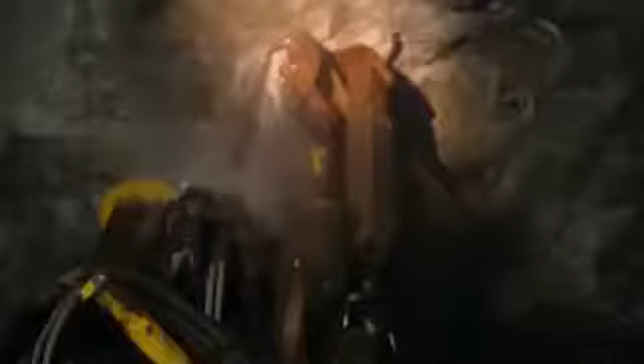My God, burning hot water. Where makeshift supports hold back millions of tons of rock. I'm gonna lose it. All for one of the most valuable metals on the planet. Solid gold. That's not even a joke, that's actually solid gold.

I'm in Johannesburg, South Africa. The locals call this place Egoli, which means city of gold. And quite literally, the soil under where I'm standing is the richest in the world. Located in the northeastern highlands of South Africa, Johannesburg sits above half the world's gold deposit.

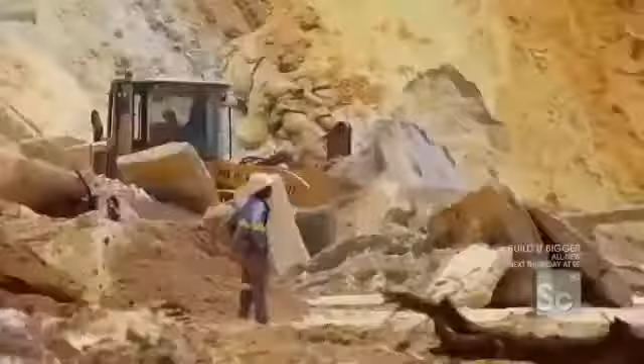When gold was discovered in Johannesburg in the late 1800s, people flocked from all over the world to mine this ore. It was so plentiful that you could actually see the gold on the surface. Over time, mines opened from the east side to the west side of the city, mining deeper and deeper into the earth. Today, there are 70 gold mines in South Africa, employing over 500,000 people.

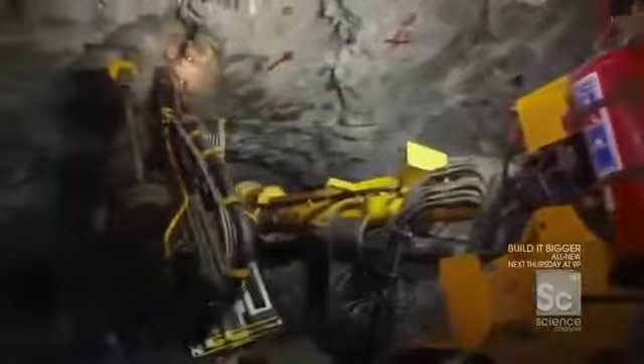The problem is, after over a century of mining, this precious resource is beginning to run out. In the last 10 years, the country's gold production has dropped 45%, while the price of gold has skyrocketed. Now, to re-establish the nation's most important industry, one South African mine is attempting to dig deeper than ever before.

An hour outside of Johannesburg, the Mponeng mine is already the deepest mine on the planet, a subterranean gold factory 2.5 miles down, with more tunnels than the New York City subway and the world's longest elevators. However, most of the original gold deposit has already been mined, and the rest will be gone in just 8 years.

So to keep the mine going, geologists have been drilling and testing in all directions, searching for more gold. They finally found it, a new deposit called a reef, located over 3 miles from the surface, holding over 140 tons of gold, worth over $6 billion.

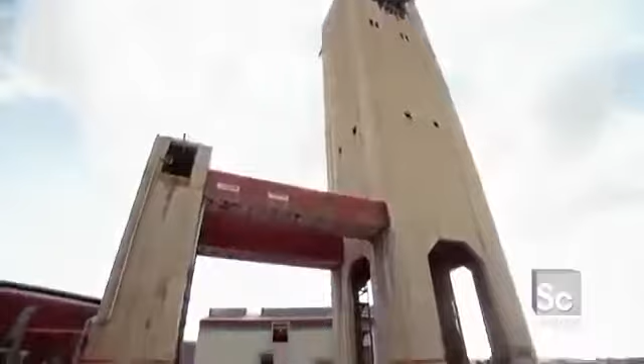So if you didn't go deeper, within about 7 or 8 years, you would have simply mined all the gold that you can get at that depth. That's right. So this new project gives you the potential opportunity to extend the life of the mine by how many years? With the current project, the life of mine will be extended to 2029. 2029? That's correct. So instead of 7 or 8 years, we're talking about 20 years.

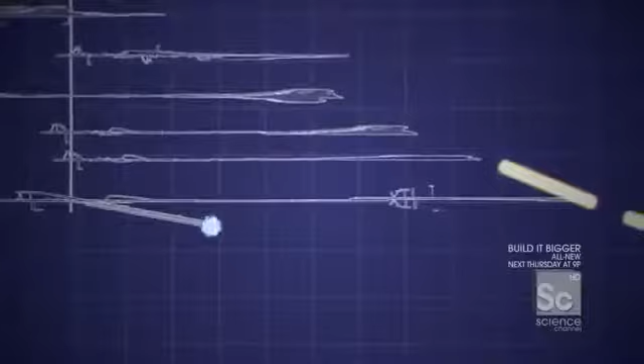That's right, yes. While the team mines out the final gold deposits in the existing mine, they've also added a new deepening team. Their job? Tunnel 7,000 feet deeper to reach the new reef, one blast at a time. The commute to a job a third of the way into the Earth's crust takes an hour and a half.

The trip starts in the longest elevator in the world, a 50-ton beast that carries 120 miners at a time. You know, given where we're going, Gordon, you guys didn't do much to kind of soften the blow and make this thing look nice. This is it. This is mining. This is reality. You ready? Okay, right, let's go. Right on key, Billy. All right, here we go.

The elevator travels at 40 miles an hour. It pretty much feels like you're free falling down into the earth. Now 1,000 feet from the surface, 2,000 feet. I'm now deeper than the Grand Canyon. I'm now almost at 8,000 feet. For every 100 feet we drop, the rock gets 1 degree hotter.

Every couple hundred feet, it gets a little bit hotter, a little bit more pressure, and you can feel that inside your head. We're now approaching the bottom. This will be 12,600 feet. Keep in mind, this is the deepest point that any mine has ever worked at in the history of mining. From the bottom of the elevator, it's another 1.5 miles to the face of the tunneling project.

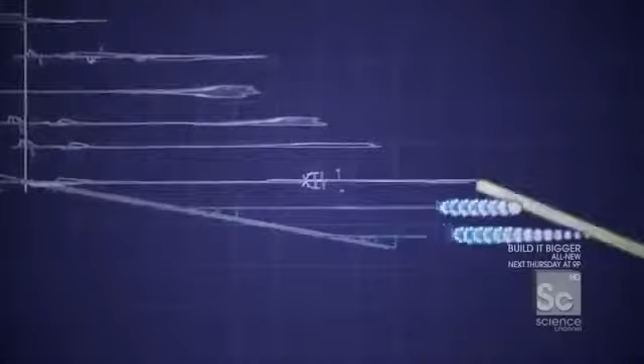The closer you get to the active face of where the rock is, the hotter it gets. So as I step down, every single step, I can feel the temperature getting slightly higher and slightly higher. And right there, that is the very deepest point in this mine. It'll take 600 blasts to reach the new gold reef. They're prepping for blast number 540.

And blasting in the deepest spot on Earth is unlike any other kind of blasting. Faults scattered throughout the rock make earthquakes and rock falls a constant danger. Punishing geothermal heat also makes the working face a scalding 150 degrees Fahrenheit. Oh my God. That's burning hot water. The water that's being heated by this exposed quartzite is literally brought to the point of burning my hand just from the energy from the Earth. Energy from the earth, and then, of course, the drilling.

Okay, so Gordon, this exposed wall right here, this is the wall that we need to get out of our way. Yes? There's gold back there. Yes? So this wall has to continue to push deeper into the earth to enable us to go up and straight out to get that gold.

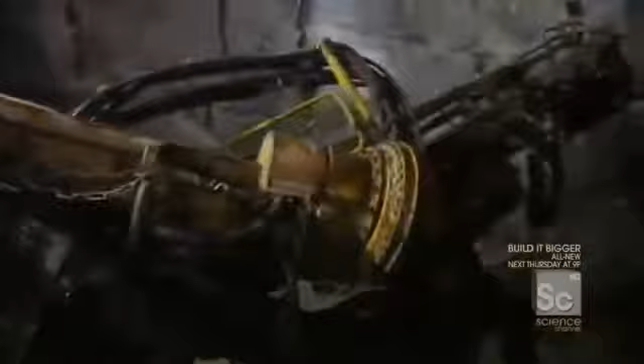Correct. The rock is riddled with faults, which means the energy from the blast needs to be carefully controlled or risk creating an earthquake. They use a diamond-shaped blasting pattern that concentrates the first pulse of energy into the center, opening up a cavity for a second and third round of smaller charges to safely break up the edges of the face.

Okay, now why do that? Why not just have an even amount everywhere? Well, you want the most energy in the center, because this is the hardest place to break the rock in. As you move outside, you want less damage. If you damage the rock on the outside, you have to put more support in it. You want to keep the ground as stable and as fracture-free as possible on the outside.

The dynamite is mixed and tested on site. Gordon, what are we doing right now? Right, we're going to test the explosives to see if it's mixed properly. There's two ways to do it. With a scale or the miner's way. Put some on your finger, tongue out. Taste, battery taste, it's good. So if it feels like I'm licking a battery, I'm happy.

That's it. Just lick it. Just spit it out and lick it. Put it on your tongue. Oh, God. Got a good bite to it. Oh, my God. That is awful. Looks like it's good enough to use. Yep, it's good. This will blow up.

So, like loading a bayonet, we have now at the tip of my lance the explosive, the cable right here. Goes in that hole. This can't actually go off, can it? It's very safe. Very, very unlikely. Okay. Push it all the way in. Lance is now in. That's it. The crew pumps 3 gallons of explosives into each drill hole.

In South Africa, the world's deepest mine is blasting 40 feet deeper each day, tunneling towards a reef of new gold worth $6 billion. Almost 3 miles down, each blast risks rockfalls and earthquakes. And with the latest blast detonated just moments ago, it is essential to quickly support the new tunnel face.

Once the blast is complete, the now newly exposed rock is susceptible to the nearly 13,000 feet of pressure pushing down in the tunnel. So to make sure this is safe before any more mining can happen, these guys have to re-support the roof and keep this ceiling up above us. So once you remove the rock, all the pressure from the 12,000 plus feet of Earth is pushing down on our heads right now. Yeah. So the tunnel wants to collapse. That's the natural desire of the Earth right now. That's a natural desire. That's what it tends to do, is to close up.

So essentially, like Atlas, it's your job to sort of push back on this rock and support this open tunnel. Yes, that's basically our job, what we're doing. You look like Atlas. You're a big man. You can hold back the rock.

And so, collaboratively, all of these 30-some-odd split sets will give us basically the roof to know that it's safe for us to keep mining. Yeah, that's what's going to happen. You got a big day.

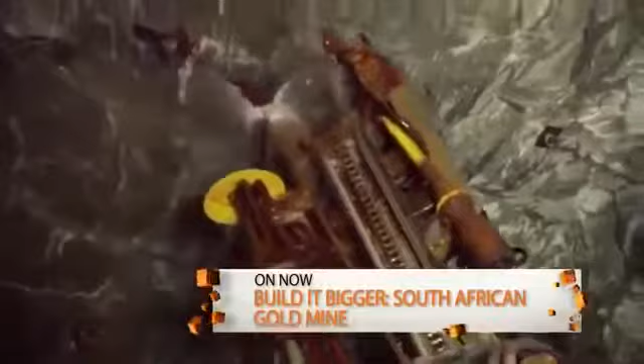The team installs them with a hydraulic drill and a motorized screwdriver. All right, so to get us started, Johan, why don't you drill the first hole? I'll drill the second hole. Go for it. So the first thing that's happening right now is that Johan flips the switch and immediately water starts pouring out to cool down the rock. All right, so there it is. Now we have a drilled hole, 41 millimeters wide, hollow, and ready for steel.

Now check this out, you're gonna watch him change bits. Out goes the drill, in goes the screwdriver. Yeah, look at that. All right, let's screw it in. All right, can I give it a go? All right, Johan's stepping out, I'm stepping in. Each drill hole is just 1 millimeter smaller than the steel rod. Yeah. So when the rod is driven in, that 1 millimeter difference creates enough friction to hold back all

17 tons of rock. So above our heads right now, you've just applied over 560 tons of force to hold back the Earth. Yes. I mean, that's what happens, I guess, when you have almost 2.5 miles worth of Earth pushing down on your head. Yeah. Incredible. That's what it takes to push this tunnel just 12 more feet towards becoming the very deepest occupiable point on planet Earth.

When complete, this tunnel will be the central highway to 140 tons of gold. Once there, miners will use smaller tunnels called crosscuts to get it out. Miners are already using this method at level 120, just 600 feet above us. It's a 2-mile train ride, and then a mile-long hike to get to the exposed reef. And it's here we'll be blasting for gold.

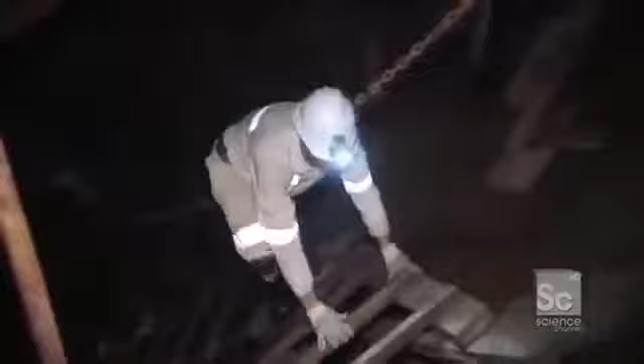Oh my God. It's just become clear to me that where I just came from, that ridiculous ladder, that was actually just the beginning. Look where we're headed next. Oh, dear God. You've got to be kidding me. This is not what I was expecting.

The biggest danger when digging 12,000 feet down is triggering a seismic event. There are dozens a day down here, and nowhere to go if one hits. To minimize the disturbance to the rock, the tunnels are kept as small as possible.

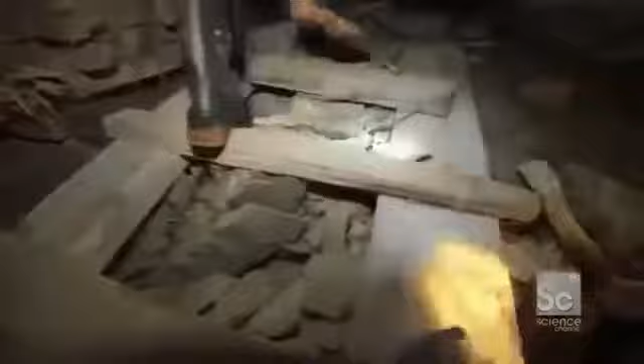Now, as I walk up this precarious angle, just keep in mind, look to either side. It's these wood rock packs that are literally holding this rock up, right? This rock, as you can see, has had its support taken out. They've removed the rock. So the inclination of this geology is to simply come right down on top of us. This support is needed to withstand the massive seismic shifts caused by the blasting.

So, Clive, on a given day like today, how many seismic events happen, for example? We could have hundreds of seismic events, but most of them happen during the blasting time. You mean when the blast just went off like 4 seconds ago? No, that's not the development blast, but the face blasting. Okay, so the blasting is going to happen here this evening. At the face, yeah. So we're on a sequential, centralized blasting method.

Everything's cool. Okay, Clive, my God, that was definitely it. I definitely thought that was it. I definitely was like, well, no, we're fine. Can I just continue? Oh yeah, Clive, just continue with what you're saying. Don't let the neighboring explosion in the rock impede your progress. What's happening inside of you, man?

You're like a metronome. The biggest mistake you do, Danny, if you start running, you're running into the danger. Yeah. If something happens, just stand still, because the moment you jump up, you can hit your head, fall over the rocks, and that's how you get hurt. By the time you've heard something, it's already too late. I knew he'd say that.

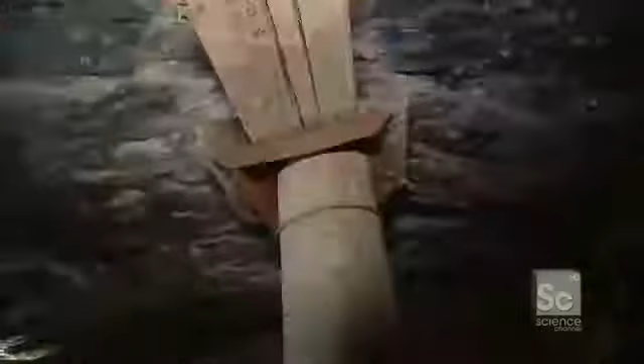So it's this guy right here that, just like a column, is holding up the roof. And we can't do any drilling. No safe work can happen until we put in these support columns. I can't deal with it. I'm going to lose it. That's why we put in support.

I understand. These 4-foot-high steel jacks push against the overhead rock, supporting a whopping 10 tons apiece. To install the jack, they first clear the ground of any loose rock. So as you can see, we're essentially wedging this thing in, pushing it down solidly into the ground, and then pushing it tight up to the rock face, and this becomes a strut or a column that holds back this rock.

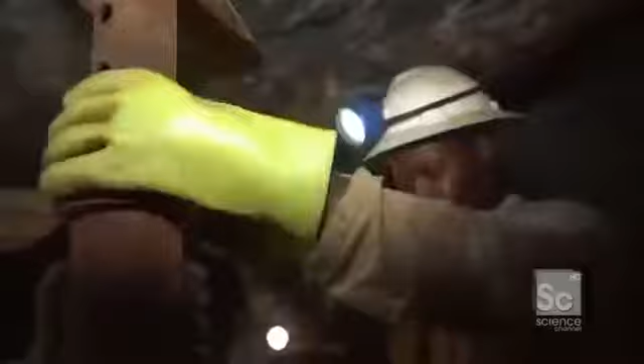So look at that, you can see right there, just like a jack that you jack up a car to change a tire, same principle. He's jacking it up, it's pressing up against the rock, and now this thing is one solid column, one of many that's keeping this roof safely above my head.

Coming up, servicing the world's deepest elevator means slicing one of the longest and heaviest steel cables ever built. This is like an extraordinarily bad idea.

For the miners that commute 2.5 miles underground, 3 shifts a day, there's simply one way in and one way out. The elevator shaft. The elevators are the very lifeblood of this job site. They are what enable them to get 3,500 workers underground and at the same time pull above ground literally hundreds of thousands of pounds of rock.

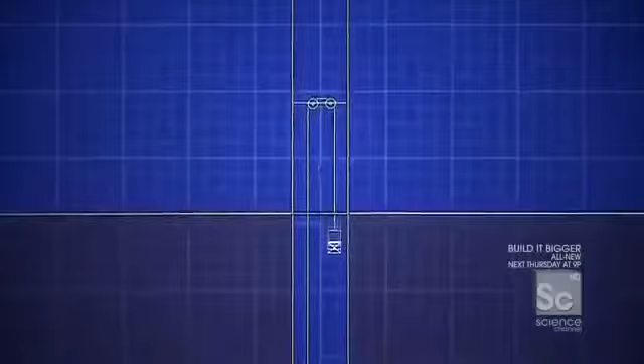So given the extraordinary requirements on this site, these are no ordinary elevators. A typical elevator uses a weight to counterbalance the load. However, a weight for an elevator this heavy would be more than 60 tons. Instead, the mine offsets the cab with a second elevator. So when one elevator goes down, its weight pulls the other one up.

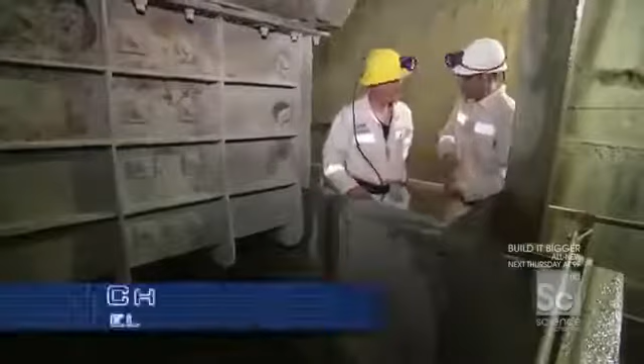Instead of having to actually pull the elevator up and actually lift its own load, you counterbalance its weight with another hoist. Yeah, with the skip that is actually descending. That's a counterbalancing effect that we have in order to improve the efficiency of your winding cycle. With 300 lifts a day, the mine's elevators travel the distance to the moon every 9 months.

You have the weight of the rock, you have the weight of the hoist, you have the weight of the cable, and all of this is happening constantly on both sides, basically 24 hours a day. Yes, 24 hours a day, sometimes 7 days a week. Including the 20 tons of its own weight, the total load on this rope can be more than 70 tons. Last year, a rope at a nearby mine snapped, dropping a cab, killing 8 miners.

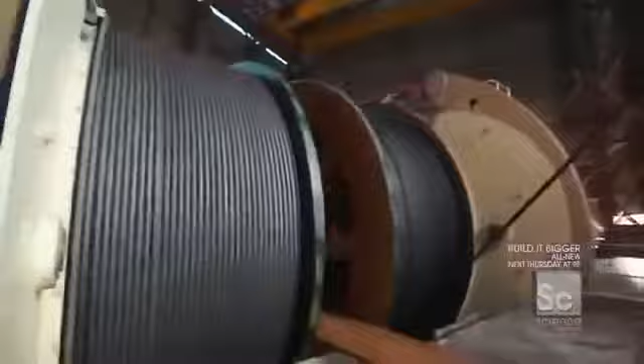So to prevent a similar failure, the team is performing a stress test on the elevator rope. What are we doing today? We're going to cut the front end of the rope and then send it away to the laboratory to be tested in order to ensure that the integrity of the rope is still all right. I mean, it's hard to overstate, but this is for the safety of people who are in the elevators, for the ability for you guys to mine. This is the lifeline of the project right here, right? That is right. It's a risky cut.

Over time, thousands of trips up and down have twisted the rope, tightening it and building up enormous amounts of torsional energy. If I have a plastic shopping bag and I spin that shopping bag, it'll spin and spin and spin, and all of that torsional energy is bound up in that rope right there. And if I let go, it'll unspin very quickly. Yes. And today, as we cut this rope, all of that torsional energy is built up inside the rope. Yes. So we have to make sure to take out the spin before we cut the rope. Yes, that's correct.

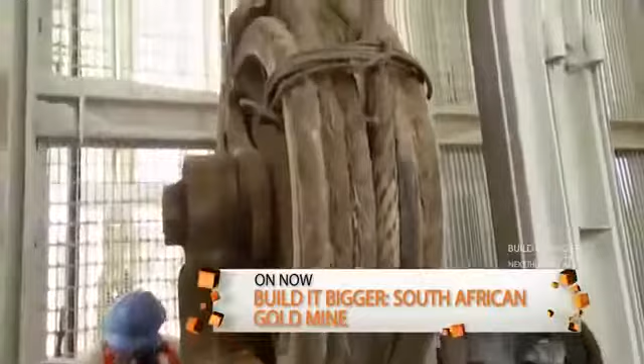With the elevators offline, no rock will be hoisted to the surface. The team has only 2 hours to get the rope section cut and the elevator back in service. The first step is to secure the elevator with a cross-beam support. So it's this piece of steel right here that locks the conveyance into place so it doesn't fall when the cable comes out. Then, while standing on top of the elevator, they unhook the rope.

And Chris, I have to put a harness on because what happens if I fall down there? How far is that? Well, we will find you 8,400 feet below. 8,400 feet down. In many pieces. In many pieces. Thanks, Marnie, a man of details.

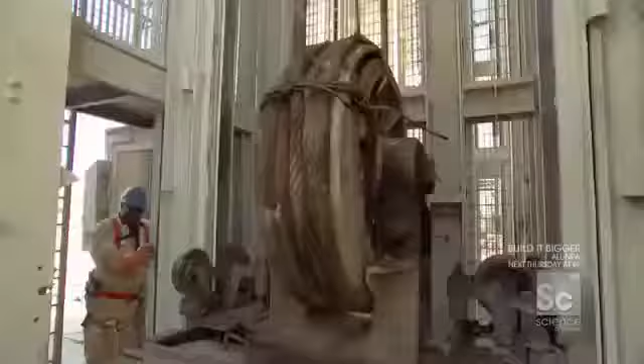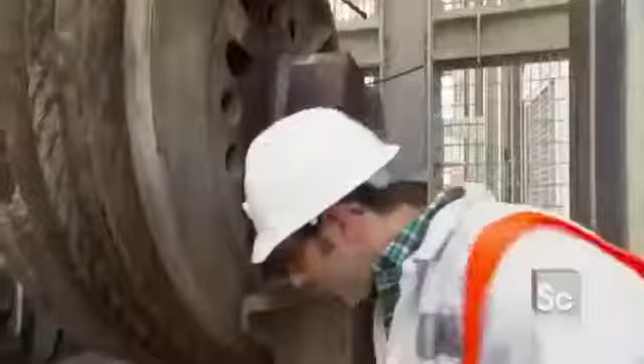The rope is held in place by a single 100-pound steel pin. It's so tightly wedged in, they have to use a hydraulic jack to get it out. That pin right there is the very last piece of steel that's holding this entire conveyance to the elevator. So basically, we're going to use the jack to just smack this pin out and disconnect the hoist from all the cable. All right, Marnie, let's do it.

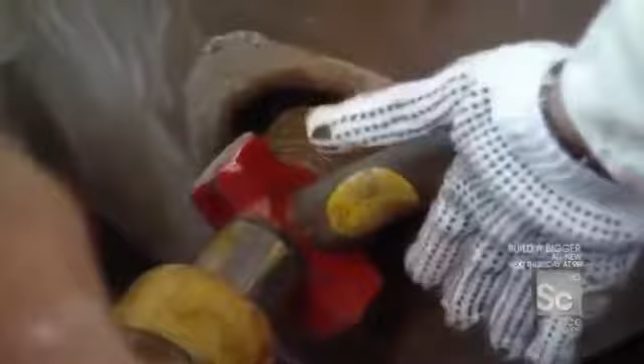Come to me. Let's make it happen. Want to bring the jack? You want the hammer in there? Yeah. Okay. Right, Nick. Is this going to go slow? Oh, Jesus. Whoa. Start up. Right, Nick. Go again. Whoa. You're right there. Whoa, Nick, man, you're going bananas over there.

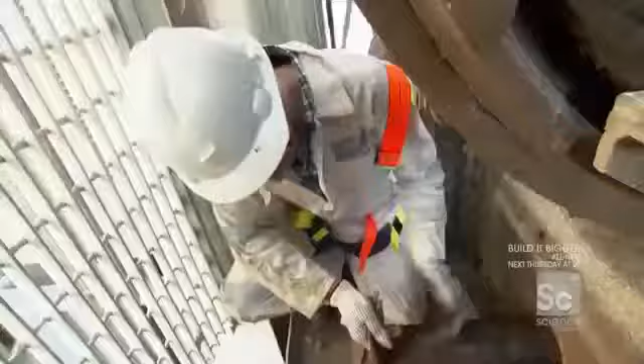To be sure the pin doesn't damage the top of the cab, it's coaxed the final 4 inches by hand. So, Marnie, the pin is like 99% of the way out, right? Yes. Okay, so slowly ease the pin out. Yeah, we just pull the pin out. All right. You ready? You want to smack? I'll smack. You hold. Is it coming? It's coming. Ready?

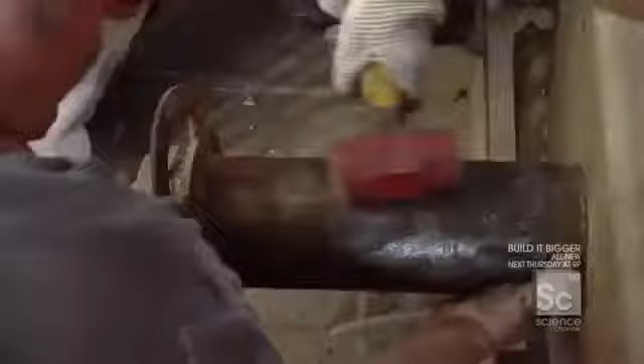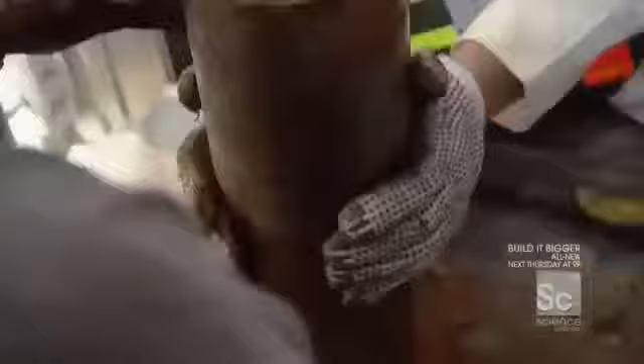Okay, hold on. Okay. You okay? Got it, put him down there. Okay. I feel like we just kind of delivered a baby here.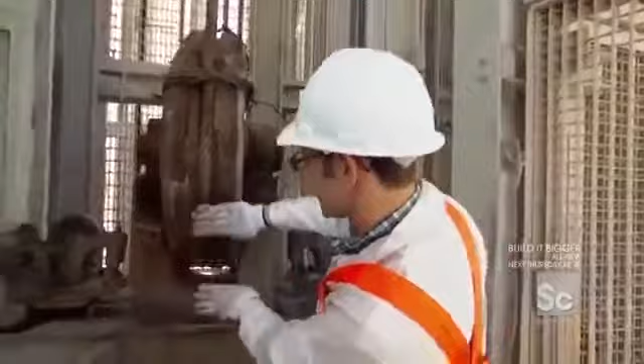All right, so let's do it. The pin is now out. Let's separate the compensator from the hoist and get these cables over there so we can cut them. To keep the tightly wound rope from violently spinning out, first they have to clamp it down. You open this up, and then we're going to take the rope, lower it into this hole, so that when we finally cut the rope, all that torsional energy, all of that spin force will get released and controlled with this thing right here.

The rope is locked in with 4 bolts. So this is essentially like a brake pad. Yeah. That's like a caliper on the brake. That's it. When it's cut, it wants to spin like crazy, but you can apply pressure, it won't spin, and slow that spin down.

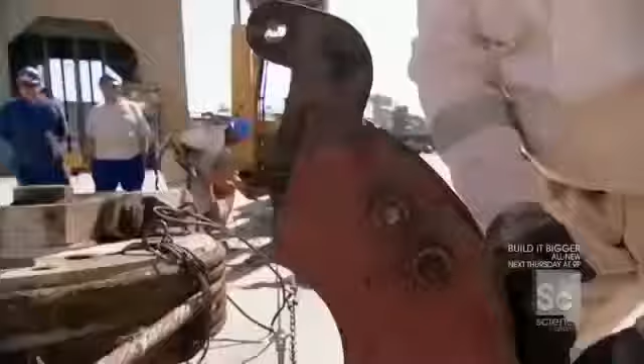With the cable locked into place, the team can now remove a 25-foot section for testing. Because it's strong enough to lift 3 fully loaded semi-trailers, the only way to slice through it is with an acetylene torch. We're talking about, you're melting this thing. You're actually cutting it with a torch. Yeah. You have molten steel slag. There's so much embedded torsional force that when you finally cut the cord, it can actually spin out and spray you with that stuff.

Yeah. There you go. Thank you, sir. Great. You can open it there. Do I need your glasses? Yes, I think this would be better. And also, let's be honest, I'm gonna look like a badass. I'll trade you those. I have an astigmatism, so. Hey, Nick, I'm gonna hit it right here, right, buddy? Yes. Right there, you happy with that? Can you see with those glasses on? It's clear? Yes, you look pretty now. I look pretty? You look handsome and clever. I don't know why, Nick. You look so much smarter all of a sudden.

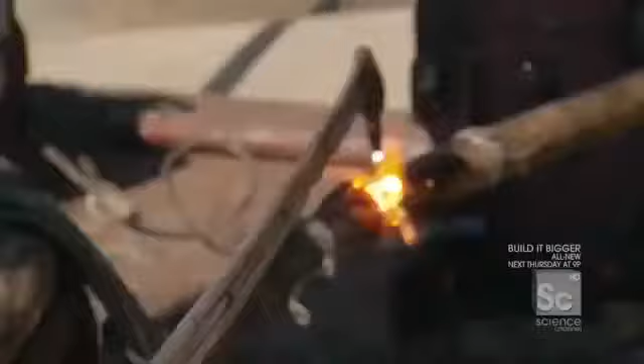All right, I'm gonna crack open the acetylene first. Open. Gets a little bit of acetylene going. And fire. This is like an extraordinarily bad idea. The torch burns at 3,000 degrees, which is 1/3 the temperature of the sun's surface. There it is. She's opening up. It's gonna kill me. It's gonna kill everyone. Extreme heat is needed to melt through the dozens of interwoven steel wires inside the rope.

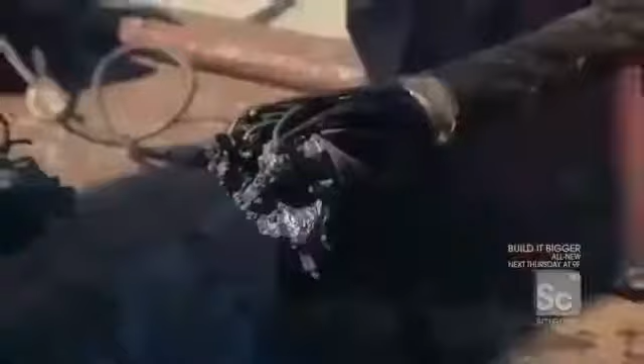Oh, there it is. There it is. Oh! All right, so I get back my glasses. Nick, the Boilermaker, gets back his torch. And we're set. Now that it's separated, we're going to release the tension and let all of that force out of the cable. Marnie, you ready?

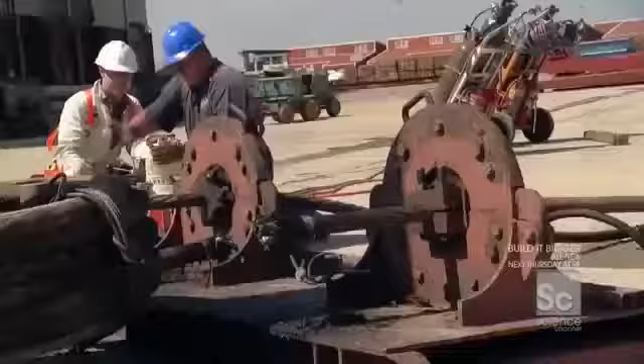Release it out, start spinning, immediately pull it back, lock it up. Here we go. All right, everyone stand back. Let's release the tension. Dear God. Ready? That's it. Again. It's finished now. Yeah. Well done. That was stressful, man. Okay.

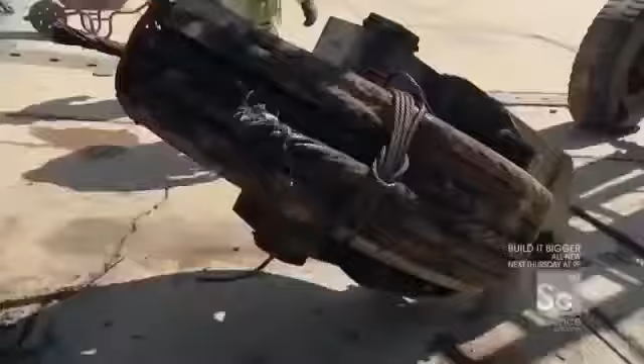Okay, with the piece now cut off, this can go to testing. And now, as you can see over here, we have to re-spool this up, connect both wires, and ultimately, within about 1 hour's time, get this cable back in the shaft and the mine working again. Coming up, I strike gold in some of the oldest rock on Earth. This is it. This is the gold.

But first, what skyscraper has the world's longest elevator? The answer after the break. Your trivia answer. Dubai's Burj Khalifa has the longest elevator at 2,000 feet, just a quarter of the size of Mponeng's elevator. South Africa has more gold deposits than anywhere on the planet.

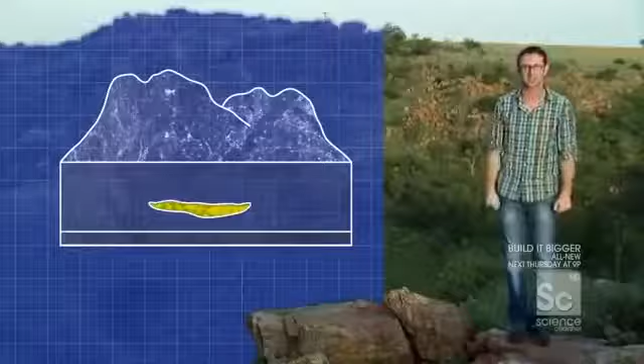Okay, this is it. This is it. This is the gold. This is the gold. This is the ore body we're gonna mine. This tiny, small 3-foot swath is why I'm now almost 13,000 feet under the ground. 100% right. And sort of packed inside of here in tiny amounts throughout.

It's gold. The gold is in dark carbon particles scattered throughout the rock, making the reef grayish, not yellow in color. What's so incredible is the gold is so tiny that, I mean, I can't see it right here. Yeah, so little. I mean, specks of it. Yeah. Like particles of sand is inside of this, that's it.

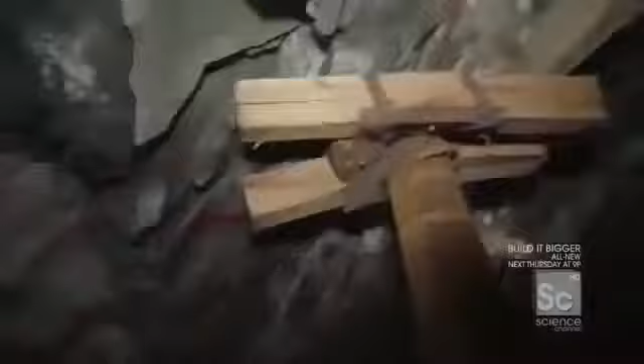The fastest and safest way to loosen this ore is to drill and blast. Are we ready to rock and roll? Yeah, ready to drill. Where's the drilling? Right down here. Down here. So now that we found the gold, now it is time to get it. Miners drill blast holes into the ore and fill them with a powerful emulsion dynamite. So we're going to put a hole about 4 feet deep into this rock using this enormous drill.

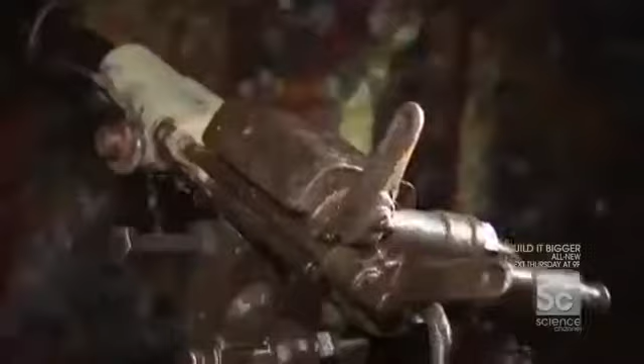Yeah. Basically, this is just a very, very large chisel that's rapidly making contact with the rock. A big chisel. It is a big chisel. Michael, Jacques, it is time for us to put a hole into this gold, get some explosives, and get what we came for. Yeah. Here we go.

The gold reef naturally dips at a 22-degree angle, which forces the miners to perform precision drilling at a steep decline. The goal is hold it tight, keep it level, and push the drill in. Okay. Push that way. Are you ready? Forward. Yeah. Here we go. Push it. Push it. The drill runs on compressed air, hammering through the rock at 6 inches and 3,000 blows a minute.

My hand is still vibrating. You're good. You're good. You can be a driller. No, I can't do it.

The reef wall is now ready for blasting later tonight. The confined space and constant earthquakes mean blasting can only happen between shifts. 5 tons of charges are detonated from the surface. After blasting, the rock has a 5-mile trip down into a storage silo, back to the shaft, and then up to the surface. After the blast takes place, all of this newly loosened ore will come sliding down this slope. It'll arrive here in the gully.

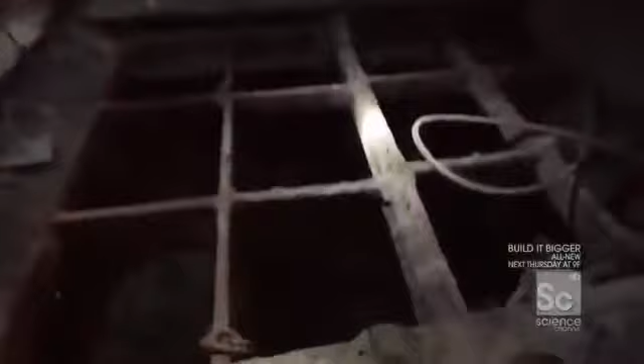It's then when this device called the scraper will essentially scoop up this loose material and drag it all the way down to something called an ore pass. The scraper drops the gold hundreds of feet into the ore pass storage silo. And just to be very clear and straightforward about how deep this hole is, if I may. Yeah. It's like the colon of the earth.

For the miners, this is what it's all about. They drilled, they blasted, they loosened up that ore, and now we're taking it, putting it down this hole, and ultimately sending it up to the surface to be transformed into gold bars. 20 miles of trains and conveyor belts move the gold reef rock to the main shaft. It's there where the gold rock meets up with the waste rock from the deepening project. Both travel side by side up to the main shaft together.

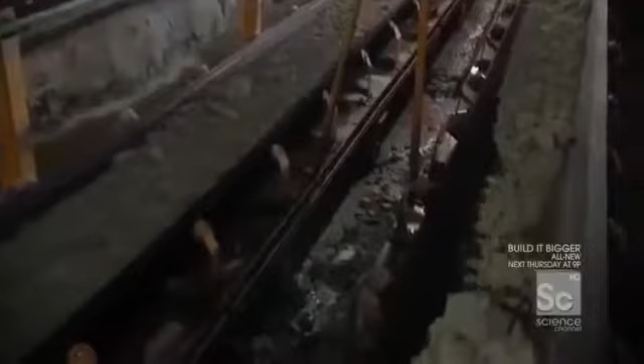The contents of that conveyor belt are worth millions of dollars. The contents of that conveyor belt are totally worthless. And every single hour, this mine accumulates over 450 tons of both gold reef and waste rock. The challenge is to get them out of the mine and up to the surface. The reef and waste rock travel down a conveyor belt as long as a football field to two 50-ton elevators. The job of sorting the waste and the gold belongs to the conveyor operator.

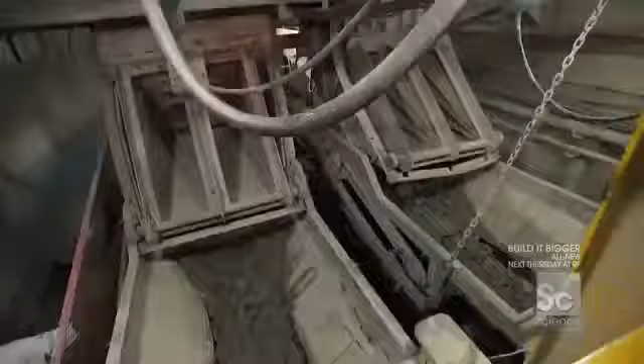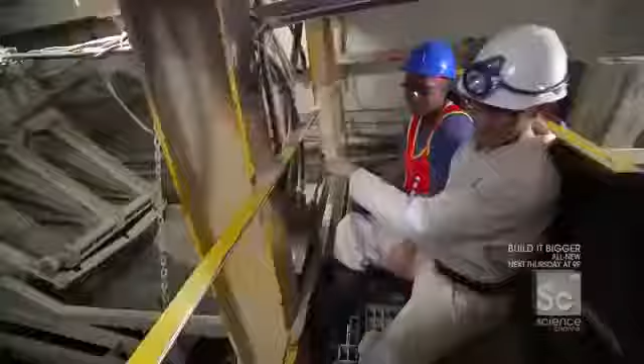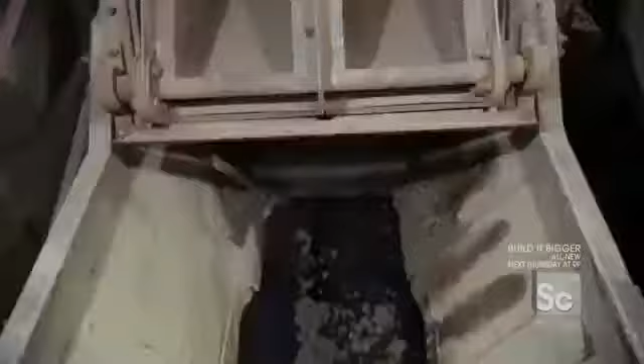Sort of appropriate, really. Here comes the big dumper. Big dumper. Not a lot of variation in the task. It's open. And closed. Open and closed. Sometimes we open. Other times we close. Yes.

She's got it under control. She is sending this stuff to a hoist, which is then going up to the surface over 2.5 miles. Coming up, I enter one of the most highly secured buildings in the world to forge $4 million of pure gold. Solid gold. That's not even a joke. That's actually solid gold.

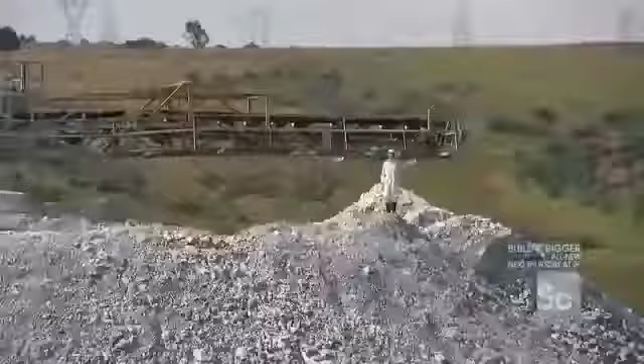Last year, South Africa's deepest mine produced 13 tons of gold and 2 million tons of ore. Every ounce of gold they mine produces 3 dump trucks of waste. Here at the Mponeng mine, in just a 24-hour window, they pull out of the earth just 100 pounds of solid gold. Now, to get that 100 pounds of gold, in that same 24-hour window, they have to excavate nearly 15,000 tons of rock. So to put this in perspective, in a given 30-day period of time, we're talking about nearly 500,000 tons of solid rock, building a veritable man-made mountain right next to the mine.

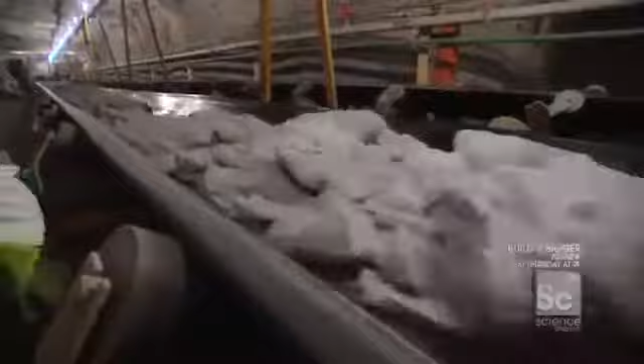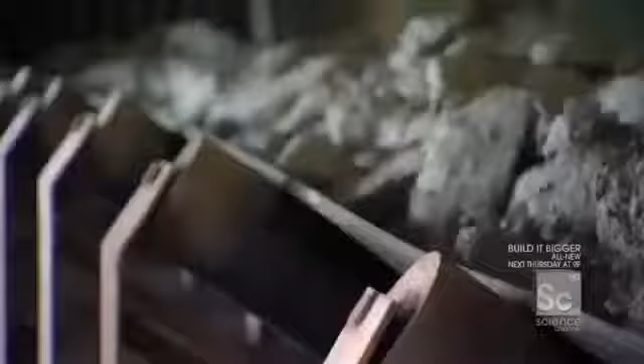Going from rock to gold takes 48 hours of processing. That happens at the mine's 20-acre on-site processing plant. So the ore that comes out of the ground is not a shiny gold nugget that I imagine a panhandler from the 1880s biting on. No. This is not it. It's not visible with the human eye. So we're talking about infinitesimally small bits of gold powder. Yes. Invisible to the naked eye, kind of scattered throughout this rock. And your job is to somehow get that microscopic powder out of the rock and then recombine it into solid gold. Yeah. That's exactly what we do.

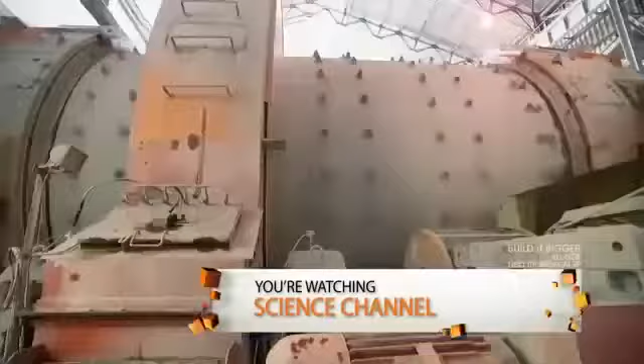First, a 4,000-ton mill crushes the ore into a sand-like dust. The team then mixes in cyanide and carbon to dissolve the quartzite and leach out the gold. The purified gold then goes to the smelting house for the final step of the process, melting and pouring. Today, they're pouring 10 55-pound gold bars worth $4 million. The product of half a week of mining.

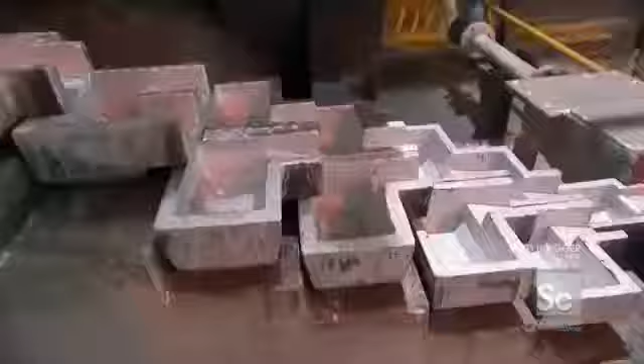Each mold contains enough gold to buy 3 Lamborghinis. This looks like a science fiction movie, look at that. That is incredible. Millions of dollars, Isaac. It takes only 5 minutes for the molten gold to solidify. You know when you finish baking a beautiful lasagna and you're about to take it out of the oven, but you're a little nervous you might spill it? Well, this is kind of like that, but a significantly more expensive version.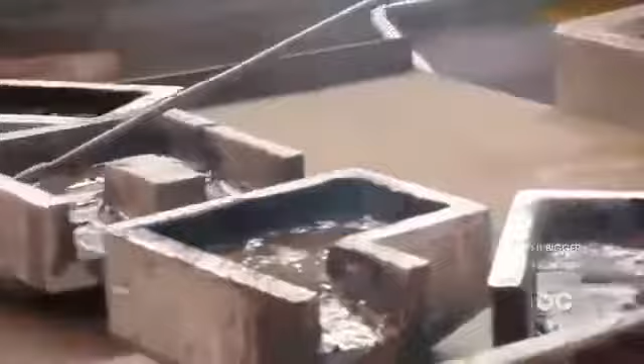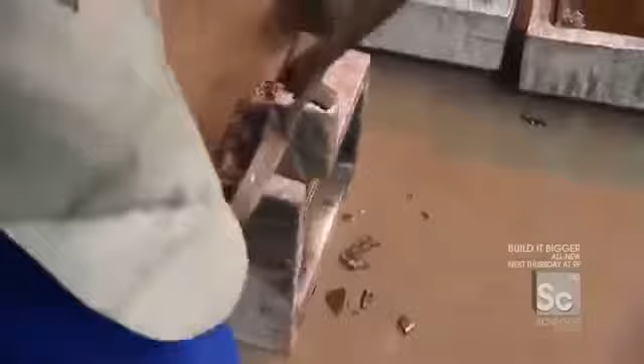Now, once we've got the gold into the molds, got to get the gold out. Flip the gold. Up. And over. Woo. Smack it out. And now, come on. There it is. You got it. Solid gold. That's actually solid gold. That's not even a joke. That's actually solid gold.

So, Isaac, that scrap right there, we're gonna throw that away. We don't need that, right? I'll take that to the garbage for you. I'll dispose of it. That is unfortunately not how we operate here. So even that slag right there, you're still gonna remelt that and keep looking for more gold. Correct. So I can or cannot take that home with me? You cannot. No one's allowed to. Even the garbage has gold in it around here.

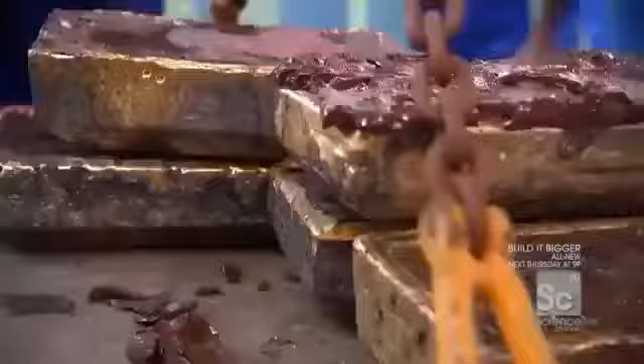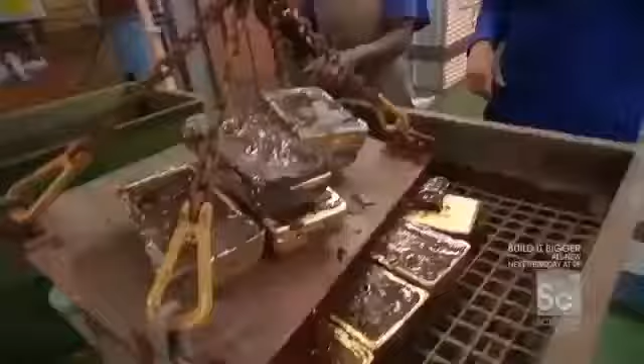The bars are encrusted with impurities, like zinc and silver. The gold is then transferred to a locked cage to clean off this waste known as slag. They're like golden brownies. This is like the burnt one that tastes good, you know, at the bottom of the batch. Okay, so now that all 10 gold bars are stacked, we're gonna dump them into this hopper and begin the cleaning process. I'm Danny. I'm Kevin Governor Koza. All right, so Governor, we're gonna now clean the gold. We're gonna wash the gold. Yeah.

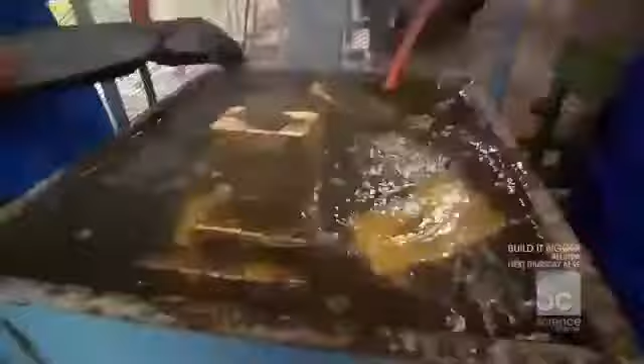Even though the gold has hardened and cooled from its molten state, it's still 500 degrees Fahrenheit. Well, this gives you a sense of just how hot the gold is. We're putting in some lukewarm water. The gold is piping hot, kicking off steam, but now you can see the slag starting to come off and the shiny gold to begin to reveal itself. Okay, now the water is drained, the gold bars have been cooled off a bit. Now we're gonna start pulling the slag off with this, the metal scaler.

Now removing these impurities is crucial. The bars have got to be 99% pure before they leave the plant. Governor, what do you think? It's nice, huh? Yeah, it's nice. You see, it looks so beautiful. Eh? Beautiful, clean, no slag. No slag. Ready to go. Yeah. There it is. The finished product.

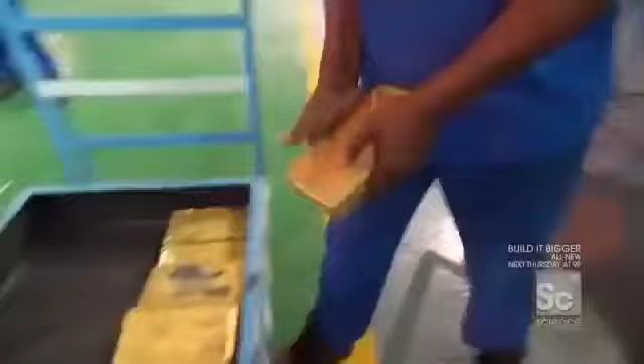Nice, shiny, solid gold. This 500 pounds of gold will be stored in a vault until picked up tomorrow by a high-security helicopter. Coming through. $4 million of gold.

Okay. Well, there we have it. All 10 bars of gold, all $4 million have been delivered into the secure vault. But keep in mind, that relatively small amount of solid gold took over 4 days of solid mining, and all of that taking place over 12,000 feet under the Earth's surface.

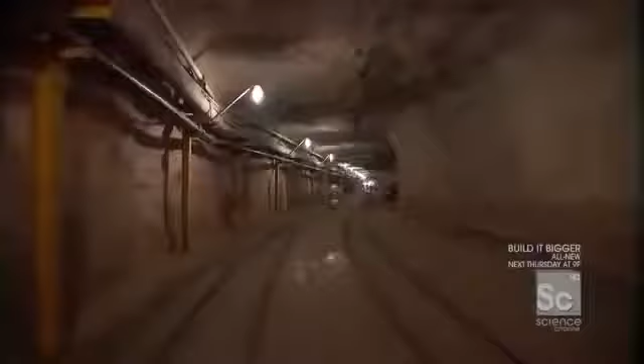2.5 miles below, at the deepest spot inhabited on Earth, the deepening team has nearly reached the end of their groundbreaking project. I mean, from your perspective, it's like every single day you are not just going to work, you're literally breaking the world record every single day you guys push. Yes. It's got to be kind of incredible. They have to give Guinness a call. Every day, though. Yeah.

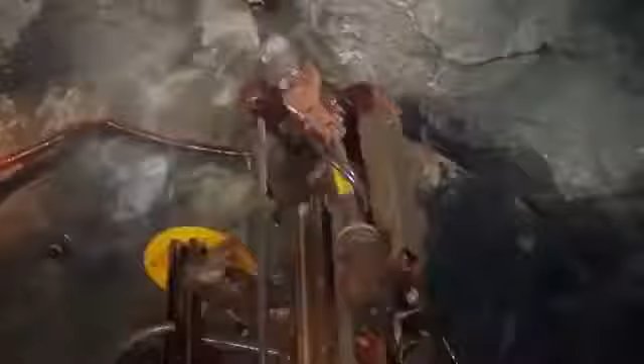The crew has 700 feet to go before they reach a $6 billion lode that'll keep South Africa's most important mine producing gold for decades to come. The value of gold is a somewhat abstract concept. In principle, we know it's very expensive, whether it's a ring or a watch or a necklace. But until you see this project and physically experience just how difficult it is to extract this ore from the earth, can you appreciate just how precious a metal this is?

And while this is an amazing feat of engineering, and this is the deepest mine in the world, the success of this project is not about breaking records. It's about the future of South Africa's most important industry and the country itself.

Morning. Morning. It's morning, by the way. It's the blackest black that you have ever seen in your life underground, because there's no other light source at all. I mean, we are so far from the sun right now. Well, 12,000 feet further than we were this morning.

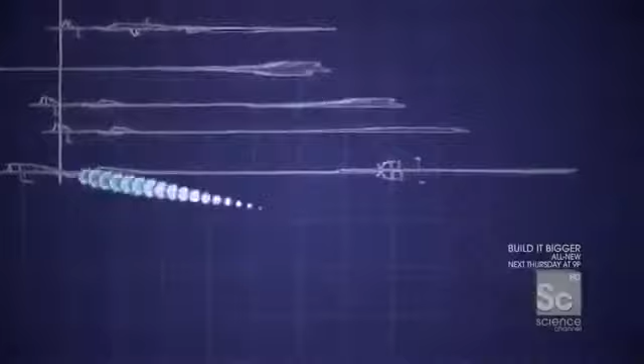The closer you get to the active face of where the rock is, the hotter it gets. So as I step down, every single step, I can feel the temperature getting slightly higher and slightly higher. And right there, that is the very deepest point in this mine. It'll take 600 blasts to reach the new gold reef. They're prepping for blast number 540.

And blasting in the deepest spot on Earth is unlike any other kind of blasting. Faults scattered throughout the rock make earthquakes and rockfalls a constant danger. Punishing geothermal heat also makes the working face a scalding 150 degrees Fahrenheit. Oh my God. That's burning hot water. The water that's being heated by this exposed quartzite is literally brought to the point of burning my hand just from the energy from the Earth. Energy from the Earth, and then, of course, the drilling.

Okay, so Gordon, this exposed wall right here, this is the wall that we need to get out of our way. Yes. There's gold back there. Yes. So this wall has to continue to push deeper into the Earth to enable us to go up and straight out to get that gold. Correct. The rock is riddled. This precious resource is beginning to run out. In the last 10 years, the country's gold production has dropped 45%, while the price of gold has skyrocketed.

Now, to re-establish the nation's most important industry, one South African mine is attempting to dig deeper than ever before. An hour outside of Johannesburg, the Mponeng mine is already the deepest mine on the planet, a subterranean gold factory 2.5 miles down, with more tunnels than the New York City subway and the world's longest elevators. However, most of the original gold deposit has already been mined, and the rest will be gone in just 8 years.

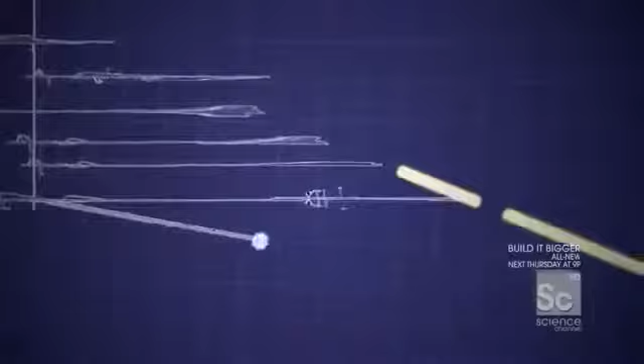So like loading a bayonet, we have now at the tip of my lance the explosive, the cable right here. Goes in that hole? This can't actually go off, can it? It's very safe. Very, very unlikely. Okay. To reach the new reef, one blast at a time. The commute to a job a third of the way into the Earth's crust takes an hour and a half.

The trip starts in the longest elevator in the world, a 50-ton beast that carries 120 miners at a time. You know, given where we're going, Gordon, you guys didn't do much to soften the blow and make this thing look nice. This is it. This is mining. This is reality. You ready? Okay, right, let's go. Right, donkey, Billy. All right, here we go.

The elevator travels at 40 miles an hour. It pretty much feels like you're free falling down into the earth. Now 1,000 feet from the surface, 2,000 feet. I'm now deeper than the Grand Canyon. I'm now almost at 8,000 feet. For every 100 feet we drop, the rock gets 1 degree hotter.

Every couple hundred feet, it gets a little bit hotter, a little bit more pressure, and you can feel that inside your head. We're now approaching the bottom. This will be 12,600 feet. Keep in mind, this is the deepest point that any mine has ever worked at in the history of mining. From the bottom of the elevator, it's another 1.5 miles to the face of the tunneling project. Over 2.5 miles below the Earth's surface, the deepest gold mine ever is getting deeper by the day.

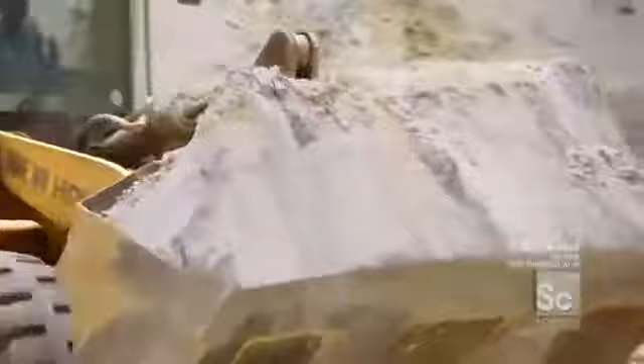Over time, mines opened from the east side to the west side of the city, mining deeper and deeper into the earth. Today, there are 70 gold mines in South Africa, employing over 500,000 people. The problem is, after over a century of mining,